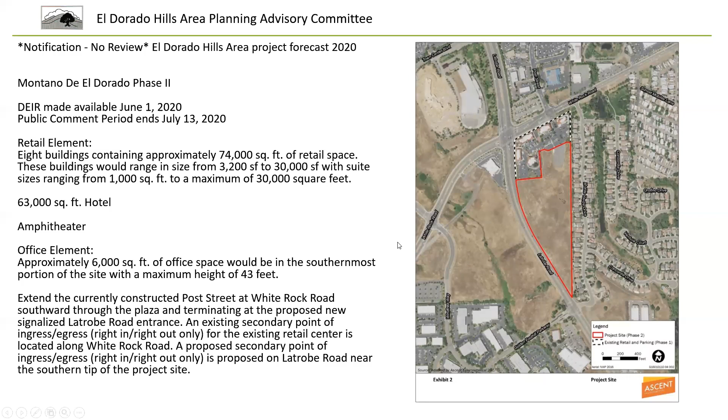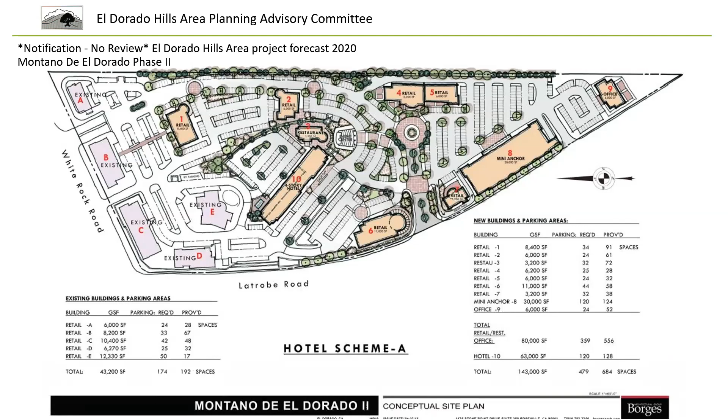I'm going to move this ahead. That's a basic layout of what the proposal was from the original documents that were proposed. And I see that Tom Purciel from the planning department is raising his hand. I'm going to go ahead—I got to get back, let me unshare this. Where are you, Tom?

There you are, Tom. Go ahead, you have something you need to provide for us. We'd love to hear it.

This is Tom from the Planning Division. I thought I'd give a quick overview. I know many of you are familiar with the project—it's been circulating since 2015 and before in various iterations. I wanted to give an overview of the EIR. I think Mr. Davey explained very well a thumbnail of the project. So if you'd like, I can go through the notice of availability of the EIR, what we're looking at, some of the timelines, preliminary information on our upcoming Planning Commission review and comment workshop, and any questions you might have on the project itself. So would that work, a quick overview and then answer questions? Sure, that'd be great, Tom. So if I can share my screen here—is my screen sharing on? I'm not sure how I would do that. I'm looking real quick.

Why is it not popping up? If you want to briefly talk about it, I'm going to try to get that for you. All right, well, as soon as you do... I have it on my screen. All right, here we go.

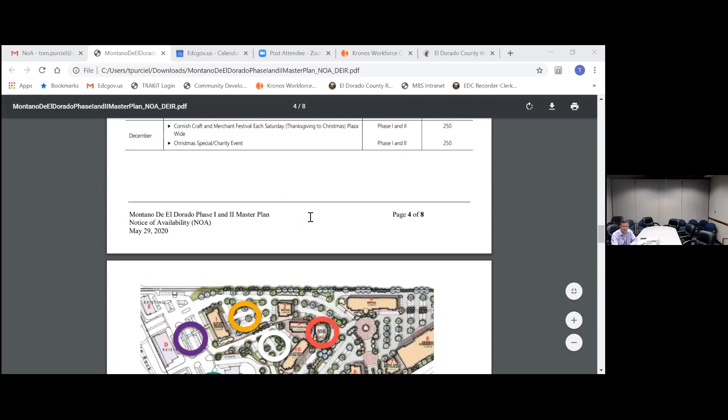This color photo shows the locations Mr. Davey was showing where the potential events could occur. I have a list here of the entitlement requests, what they're actually asking for to allow for this coordinated development between what's there now and what's being proposed.

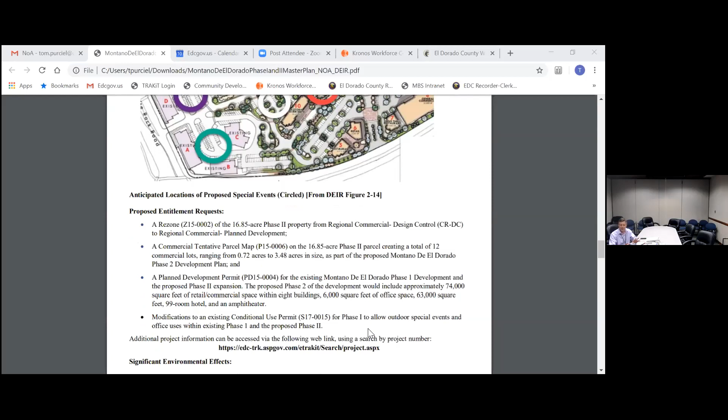These entitlements will help them move across property lines, share special events between areas of the plaza, and allow, among other things, a use permit for office uses, because this may allow regional commercial shopping but doesn't allow office for some reason.

So that's also being added to give a full spectrum of available uses. This is a summary of the environmental effects discussed in the draft document that you can link to. You've seen the preliminary site plan and the preliminary aerial photo of the location. I'd be happy to answer any questions, and the applicant is also available if you need more details.

Does anyone have any questions for Tom? John Rasslier, I do have a question.

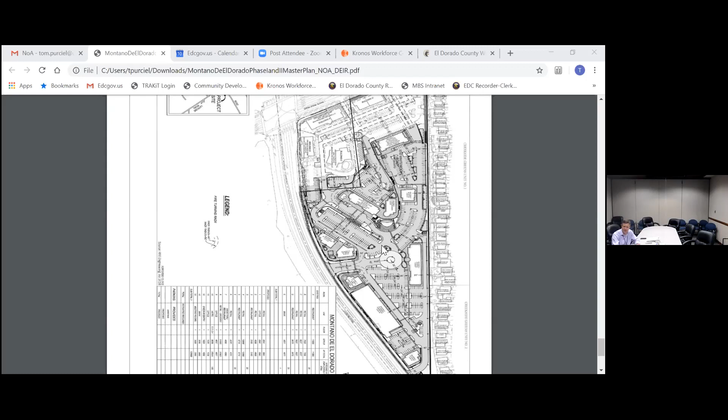How does this new proposal, how is it different from what's been presented previously? In terms of, not sure what you mean by presented previously. Well, we've seen this plan before at least two times, and I'm wondering what has changed that it has to be shown now a third time.

I know one of the reasons this was circulated before, and it didn't change much from the time APAC saw it before. That was its original submittal, out as part of the scoping for the EIR. The initial announcement that an EIR is going to be started, the first step in the California Environmental Quality Act, is to do some outreach, some scoping, for projects of this nature.

So the initial map you saw was very similar, but that was to scope what environmental effects to study, to get input from the community as part of the various workshops it covered. That document went out in 2016, and we had another in 2017, if I'm not mistaken. This is not the first time you've seen this, but it is the first project document attached to the formal environmental impact report.

Thank you. I believe the scoping meeting was in 2017 and it was recirculated in 2018. Correct, yeah, so it looks very similar. And as you suggest, this is the first official release of the project documents with the draft environmental impact report.

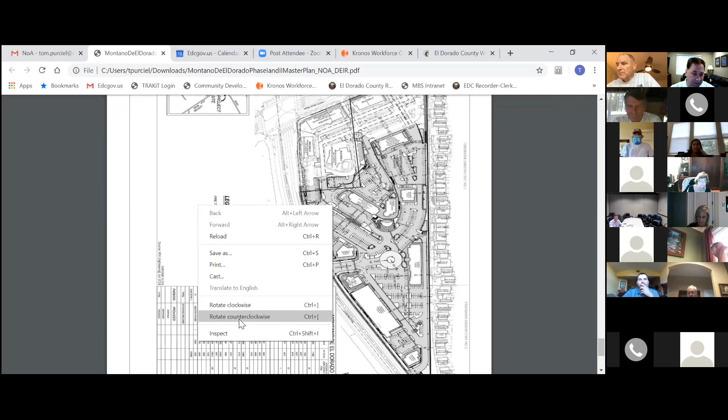Yeah, I told Tom, I asked Mel Pavlinas how long he's been in the business. He said he's been with planning for the last 15 years. And I said, hey, you've been working on my project for half of your career. Sure, but planning's done a fantastic job. I can't tell you how blessed I feel having Tom on board, Tom Purciel, Mel Pavlinas, all the people up there in the planning department has been tremendous, and I can't thank them enough. So I'm here at your disposal.

I think we've got a very, very nice layout. I think we've got a beautiful presentation for everyone. We've paid attention to detail and to the residential areas behind us. And I'm just hoping that we're going to end up getting some support on this thing.

That's good, very good, we're so glad that you called tonight. We actually have a couple of residents that have their hands up, they would like to ask a couple of questions. So Dan, would you want to go ahead and start? Sure, sorry about that, I was muted.

So questions I have are really around the amphitheater. I have concerns, I could throw a rock and hit it, so it's very close. It's not far from the property line of Creekside Greens. One of the concerns I have is, it sounds like a nice thing, but as it is now, when Relish is having live bands, when 36 Handles is having live bands that are supposed to wrap up by 9 o'clock, I'm still hearing them at 11 o'clock at night. I can hear them, I can make out words in my backyard.

So what kind of controls are we going to have in place to really have some sort of a limit on the times that these are going to be, the people in those houses along the fence line are going to be blasted by that amphitheater?

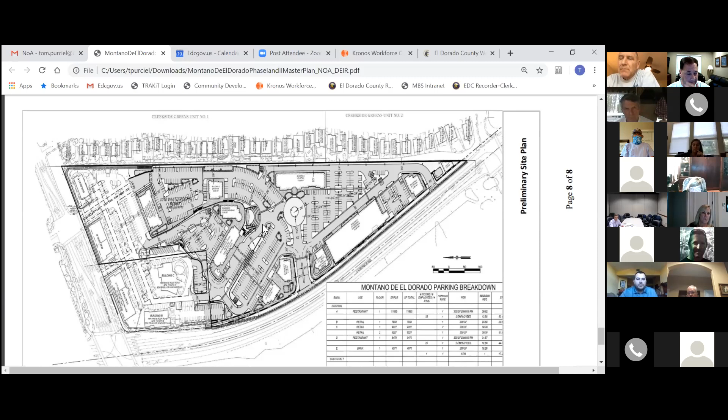But if you take a look at it, we're building that amphitheater down into the hillside, and the stage is actually down where, when people are sitting watching the presentations, they're looking down with walls on both sides of them that go down between, I believe, 15 and 20 feet. So the stage is basically in a hole. And within the EIR, we've identified landscaping and sound deadening walls and times that we're going to be wrapping it up, and that's going to end up being mandated through our development agreement.

Not to mention, we also have to have certain noise levels that are within toleration and low, and that's also identified in the EIR.

Mainly the reason why I put this in, a lot of people said, look, what are you doing, that doesn't make any money, it's just an amp. I'm doing this for the community. I had Runway Boutique saying, can we do bridal shows there, can we do a runway there? Can EDMT, the El Dorado Music Theater, can we pull them in there and have some things for the community?

So we've got Town Center next door. They've got a thing over there where they've...

Put me on speaker. I hope not. Oops, did you just get muted? Mr. Perkins, are you muted? There you go, okay, it said muted and I didn't know what it was. Yeah, and I didn't touch anything, I've been just sitting in my chair. I know, I just saw it flash up. So, but we heard you right up to after you discussed...

Yeah, so I'll wrap up what I was going to say. I was just going to say that Town Center's got a big deal going on over there where they're blasting big time music with thousands of people. This is nothing like that. This is nothing more than the possibility of bringing kids in to do some plays, maybe doing a Monday night movies at Montano with some black and whites or something, wrapping it up at 9 o'clock, doing some daytime stuff maybe.

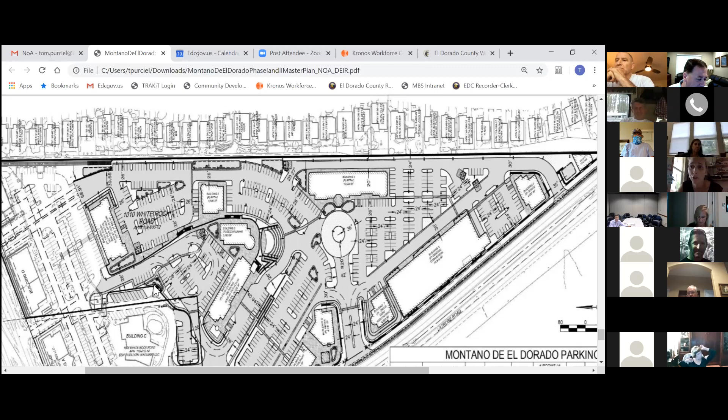Tom or Mr. Perkins, do you want to address the post extension through the project? Tom, do you want to tackle that, or do you want me to?

Well, actually, I don't have a representative from transportation here, which is the folks that would be recommending the improvements or the site-specific transportation impacts. So if you wanted to go ahead and explain the top level of what we're looking at, I can pull up the plan here.

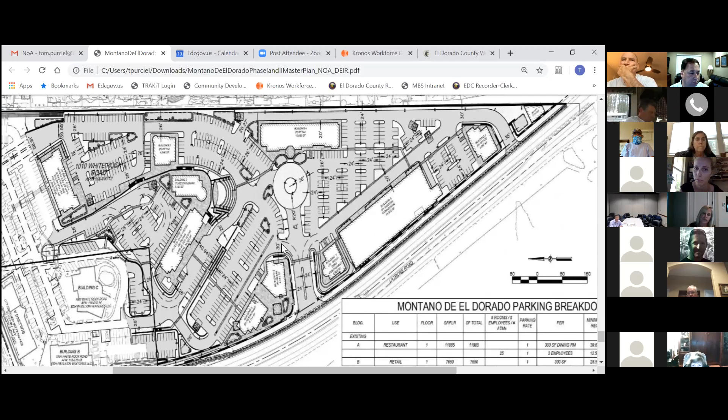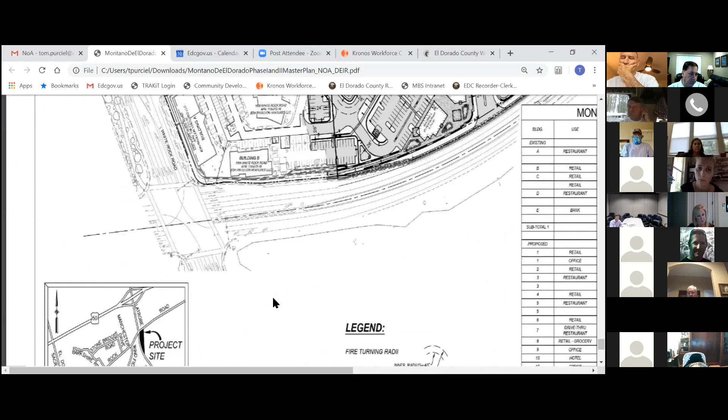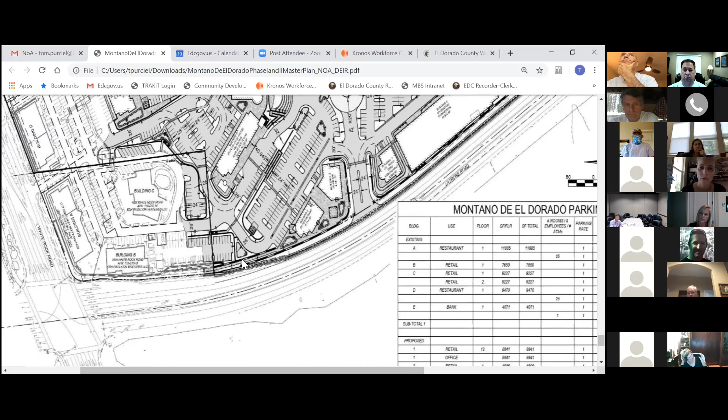We've been working on this for years, because any shopping center with this type of investment in amenities can't survive with just a right-in, right-out. So we were looking at the traffic signal dead on between Monteverde, or Golden Foothill Parkway, to the south and Latrobe and White Rock to the north. What we found was that if we added a main entrance with a full movement signal in the middle, dead on along Latrobe Road—and we're even talking with possibly Jackson Properties for something else—if we could get dispersion of vehicles so they could visit Montano or daylight through Post Street onto White Rock Road and travel eastbound to Silva Valley Parkway, or go across to Town Center, which we're lined up with, they'd be able to do that without impacting that big intersection of Latrobe and White Rock. At the same time, it would provide adequate access for the gross leasable square footage this center is hoping to present.

The entrance to the south, closest to Monteverde, is nothing more than a right-in, right-out. It's already existing; all we're doing is adding onto it, so people traveling northbound along Latrobe who pass Monteverde have the opportunity to take a right and go into the south end of the property. That's also where we're going to put a 10-foot sidewalk and extend it to Monteverde, which will help with the bike lanes.

No, I appreciate that. I remember when it was presented, I had asked if those sidewalks could be extended all the way to our neighborhood so our community could really walk there and utilize it. The reason I bring it up is my main concern is when White Rock is extended, we're getting blocked from exiting left currently out of our neighborhood. So Monteverde is going to become a huge intersection for us leaving our neighborhood and being able to go in whatever direction we want.

I'm concerned about that right entrance just because of the speed limit on Latrobe right now. I feel like we're coming onto Latrobe trying to get up to speed, and then someone's trying to make a right-hand turn right in there. But that's derailing this conversation.

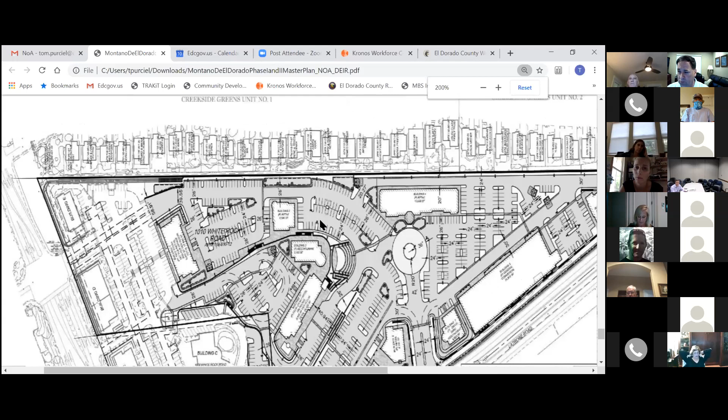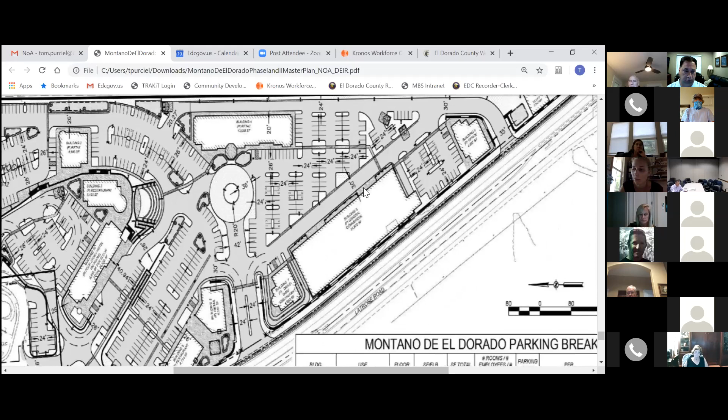In looking at the residential area and this regional commercial center, I did everything I could to pull these buildings as close to Latrobe Road as possible. But we also needed to make a site plan work. So in looking at that, we pulled the hotel and paid particular attention that we angled it, so that the majority of the visual aspect from that hotel is looking off into areas to the north and south, and not towards the residential area. We did the best we could on that one.

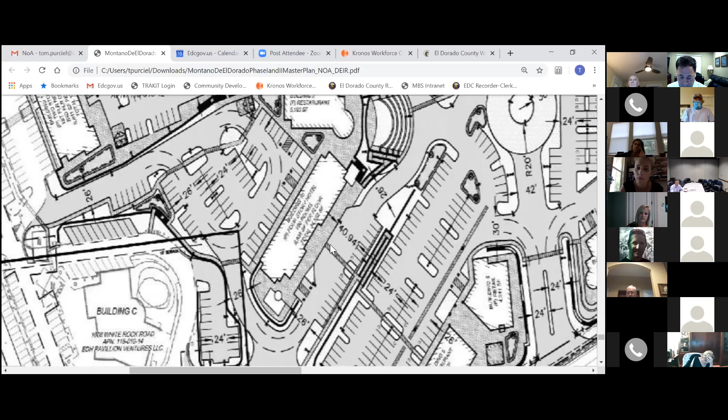What we're looking for is a Marriott SpringHill Suites. If you're ever up in Roseville or in Natomas, there's a few Spring Hill Suites around - it's a typical hotel. Usually they go 124 rooms, but we actually shortened it and ended up going with 100 rooms. So it's pretty much down to the room the exact same size as the Holiday Inn.

I think a while back, I'm going to have to look into our archives, I thought we did a visual impact analysis. Do you remember that, Tom? I'm looking at it now. I don't... that would be a good question.

If folks don't mind submitting that for a comment, I'd really appreciate it, because unfortunately with the technology and schedule limits, the EIR consultant - I don't believe he's on the line - but I know they did some studies on that, because height and visual is one of the criteria for impacts they have to look at. I don't have my fingertips on exactly what they looked at, but if I can find it while we're waiting, I'll let you know. I would definitely like to make sure that comment is filed so we can make sure it's addressed.

That being said, I was the developer of the US Bank as well - so don't get out your pistols and shoot at me, all right? But we learned a lot on that one, and we did everything within our power with everything that was going on.

We did everything we could to make the backyards of those other properties look good, even though you had a big retaining wall there. What was there before was a big fence line and a detention basin - an overground detention basin for stormwater. That's what was there, and then there was a hill that went up, and the shopping center was there. What we did was dig a big hole and put that oversized detention basin underneath the parking lot at US Bank.

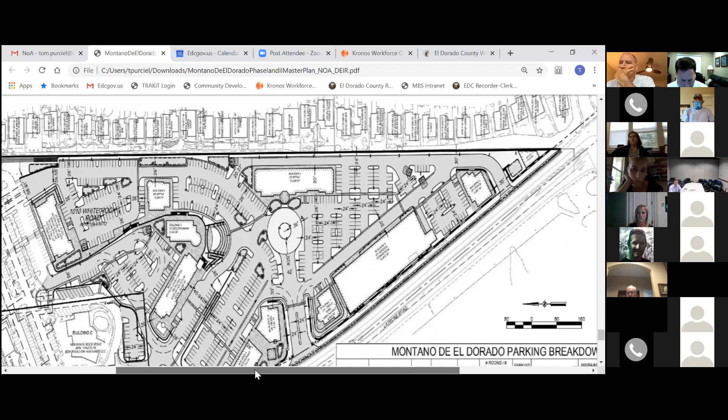Hi, my name is Carrie, and I am a resident of Creekside Greens, which is the homes right behind your proposed building, and I've lived here since 2005. When I first saw this, it's the first time I've seen this, and I did get something in the mail - I haven't seen this proposal over the years. Thank you, Chrissy and Dan. I'm warming up to the idea of all this. I guess my primary question is, how are you going to help control traffic in our neighborhood going into Monte Verde and into our community when construction is going on and thereafter? We're a small development, and the last thing we need is people speeding through our development - we already have traffic problems. So how are you going to help control the construction phase of this?

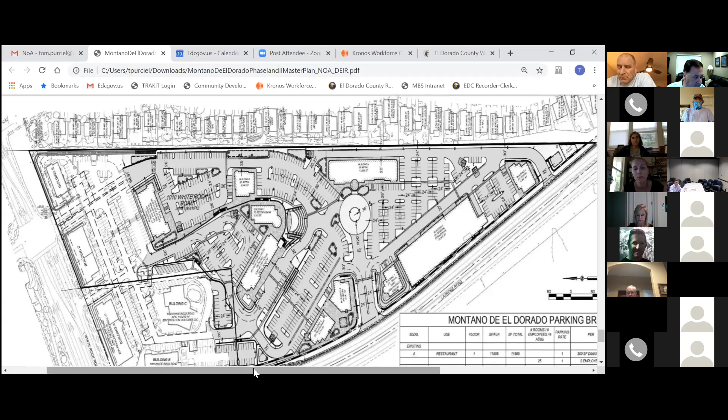I hope Tom is listening to this, because you bring up a valid point. When you talk about this, I think about offsite developments. If you're biting into Latrobe Road and expanding it out, you've got guys out there with flags, and certain things going on that impede traffic moving north to south on Latrobe, or even on White Rock Road. I can see that, but we've already got our entrance into phase 1 that is not going to be impeded whatsoever - nothing's going to change. Nobody's going into the new area, and most of our access for construction is going to be from White Rock and Post Street.

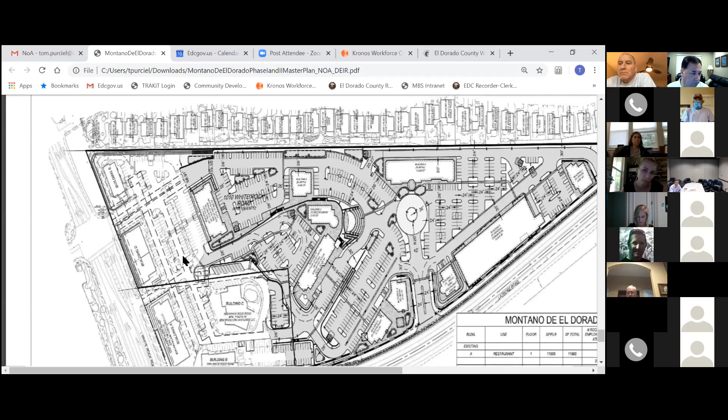I wish I had a little... can you guys see that? Yeah, can you all see that? Okay, good. I like that. Can you see my screen here? Yeah, I can see it.

I think most of our construction material is going to be coming up through the main entrance, and it's going to come along here and move along the back end and come in where the graveled area is now, where the construction trailer is. But as far as Latrobe and White Rock being impeded by any of the construction, this is all on site, and I don't see anything.

Impeding traffic along Latrobe - what's your comment, Tom? I would echo the same thing. I'd like to get more information from transportation, because those are the folks that do the field work implementing construction planning, signage, and traffic safety. The operations has a whole DOT unit of our county that just does that to make sure impacts are reduced. The environmental impact report will address some of it, but what's already covered by law and policy under regular operations will be handled by DOT. So I would rather have DOT speak to that.

I don't believe they were on this call tonight. But if those of you who can join the Planning Commission Zoom workshop item on the 25th, I would definitely ask that question of DOT again, because they can give you the details. I don't look at that part of it usually.

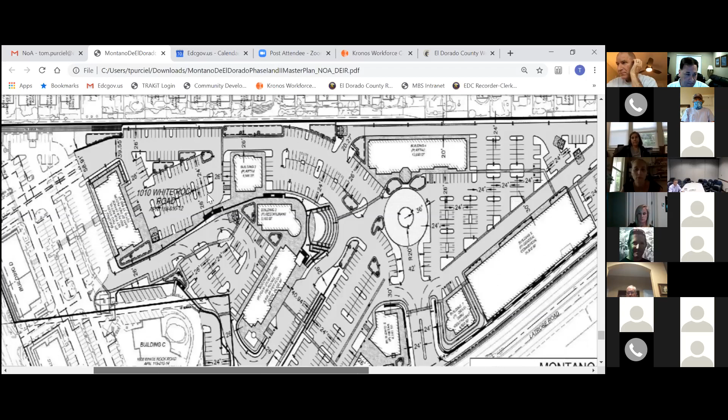And by the way, when you guys take a look at the events, we're not going to have all those events. I just pulled out every event that I could think is feasible for this project, because in El Dorado County, for each event you have as a one-day use, it costs $1,000 for whatever it is. I think the community would like to see some things happening in this shopping center - you take a look at Patriots Day, the runway stuff, El Dorado Music Theater. I've had kids go through the music theater, I think they would love to have an opportunity to see this. I don't think it's going to be that big - it's not Town Center, it's a beautiful retail plaza, but it's more boutique. It's not a town center.

Okay, thank you. Let's see who was next - Lauren was next.

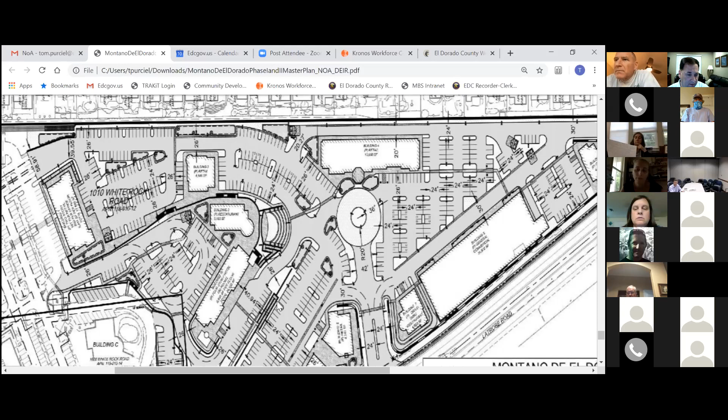So I read through some of the 300 plus pages. One of them mentions that a subwoofer was never going to be allowed at the amphitheater. So it got noted, and the reason I got it noted is, what's the follow through, what's the follow up, what's the enforcement? Those questions don't have to be answered now, we're trying to get this done quickly, so I just want it noted.

When you're taking the rating for the noise, I would like to know, because it doesn't state where the noise ratings are done. Our house is specifically right in the middle of our neighborhood, and there isn't a single place that if someone has a party in their backyard or does something up the hill that we don't hear. It's literally, like she was saying verbatim, I can repeat people's conversations. It's like being in certain places where they built it, where you can talk on one side and all the way across the yard field, you can hear the words. And a lot of people in the neighborhood open their windows at night in the summer to cool their homes. So that would be another thing - where are the ratings taken? Is it taken just around the site, or is it actually taken in our neighborhood?

And then when the concerts go too long, after let's say 10 more years of development being done, and nobody remembers that it's not supposed to go past a certain time, who would we hold accountable? Do we call the sheriff's department on that? Or is there some way to report those things and have a process for complaint?

Yeah, that condition is going to be in perpetuity. It doesn't matter who owns the shopping center. Nobody's planning on selling it anyway, but you never know, you never say never. But it is in perpetuity, it is going to be in the development agreement.

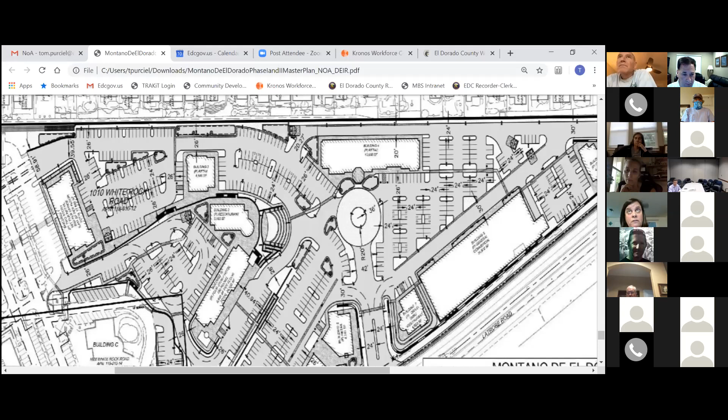We have 2 entrances. I think one of our concerns that wasn't understood is that both of our entrances are double-backed, so it's one entrance and an entrance, and an exit and an exit. One of our concerns also is, due to the recent situations with fires, we only have 2 ways out for 179 homes in this neighborhood, plus a possible another 6 duplexes that could eventually be built here. If you times that times children, families, and cars, that's a lot of people coming out of 2 small exits, and the impact there. So I would really encourage that traffic pattern to really be looked at and give some real actuals, with us having to leave in rapid succession, what that would look like with those lights.

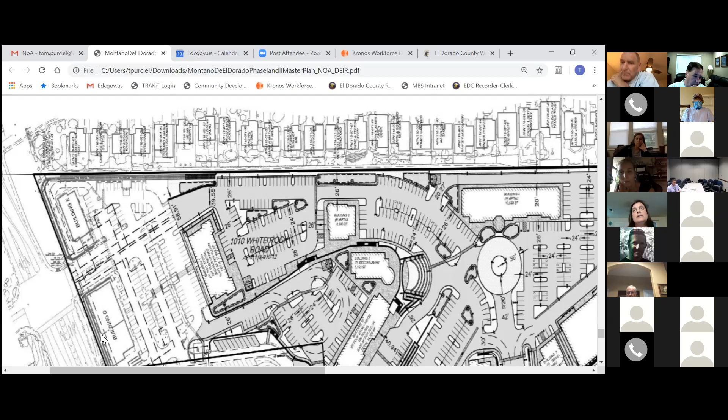And without a light. And then also, developer versus the people that live here - who is the responsible party once the developer is done with developing? Like I said, our neighborhood got developed, there were rules written in and stuff, and now we don't know who to go to get those enforced anymore. So I just like somewhere where that's going to either be documented or said. It doesn't mean that we don't want development, it does mean that we want to work as a partner and make sure these things are documented.

I think that you just have legitimate concerns, and that this is your home, and you know, to many it's the greatest investment of your life. I get that. You have - I raised my hand.

Okay, go ahead. I just wanted to ask, as the project manager with the county, were you going to be submitting those comments in writing so I can make sure all those questions you had are addressed? There were a lot of them, and I'd like to make sure we don't miss anything. I think we're going to work as a team in our neighborhood to make sure those are addressed, but I wanted it said so everyone was hearing that those are some of the concerning issues.

And when you do have a meeting, whether it's through Zoom or otherwise, this is kind of how I work, can you keep me as a developer informed, and I could be at your disposal?

That's fair. I believe we were talking about a possible follow-up dedicated to this project, and we had looked at that 45-day timeline, talking about sometime next week possibly. But if 60 days is more appropriate, then maybe it doesn't have to be next week. We'll take that offline, and I believe we've had those conversations. But we'd like to get more residents involved, and we want to be fair so you have time to answer questions, and fair to residents to ask questions too. We're a little constrained tonight.

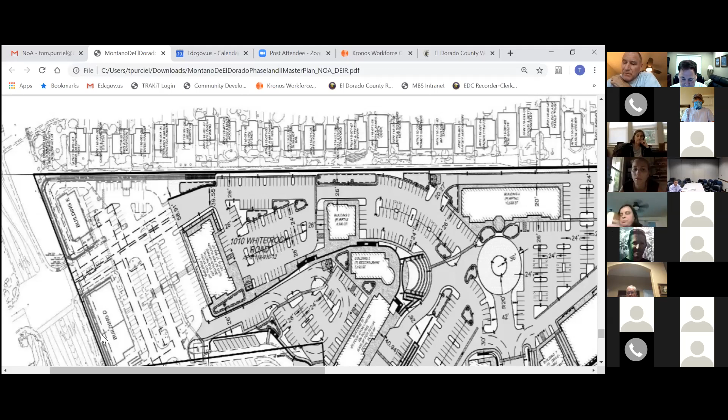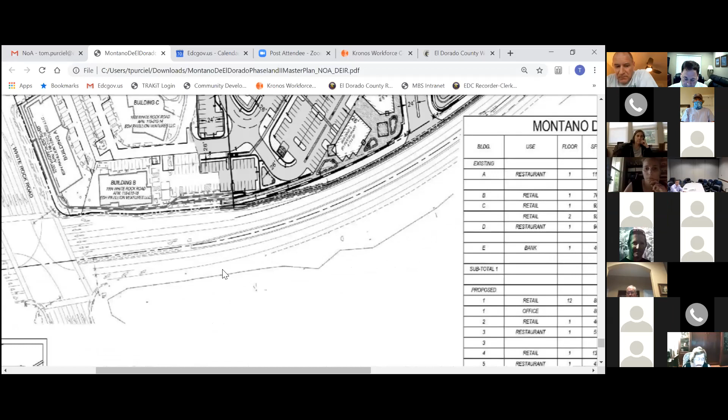You want to tackle that, Tom? I know transportation has already looked into that in very great detail, so I would defer most of that conversation to DOT, not that I can't take a stab at it, but those are the folks that have actually run the traffic counts. They've done some physical counts.

They've run computer simulations that are some of the best in the state to see, because I personally run our traffic demand model. Most people don't know that, but digitally they can get really close on seeing where the intersection choke points are going to be, for nothing else, to see where they need to be putting into their development plans. But those are all the studies DOT does, and that's what they spent large sections of this EIR doing. DOT has also crafted several custom conditions of approval to make sure that whether the state continues changing the CEQA environmental metrics for traffic, or not, as they have recently changed, the issues for traffic control will still be handled through a lot of these custom conditions on this site.

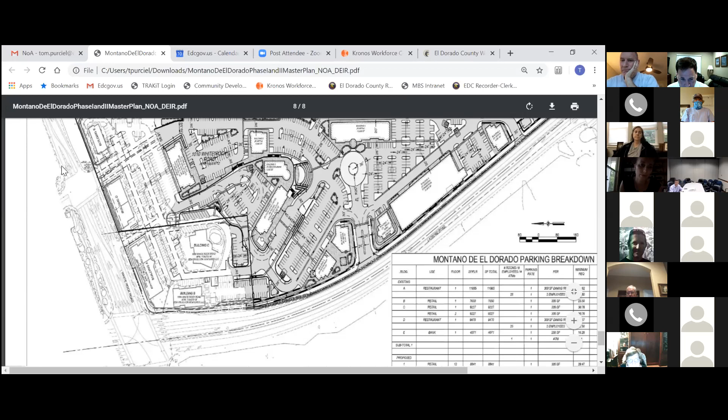My question is, I like the plan, I really do. But this intersection here at Post Street and White Rock, do you see it not impacting White Rock going east towards Town Center? Do you think that would not be impacting White Rock at all, or somewhat, or a whole lot? Especially with all the apartments that they're building in Town Center.

I think I'm going to try to get through this with the echoing going on without screwing this up. All I can say is that I'm watching the JPA connector and how that is going to impact that intersection. With those apartments going into Town Center, there's always going to be an impact, but it actually also makes that intersection more feasible than ever. It helps. If we have the access on Latrobe Road, along with the access there and the right-in, right-outs, we're going to have appropriate dispersion, as we've studied. I think DOT would agree with us, and I think that's why we're doing it. Not to mention, we're going to be doing traffic signal timing with fiber optics. God knows how much that's going to cost, but that's a condition. I appreciate that, thanks, I appreciate it.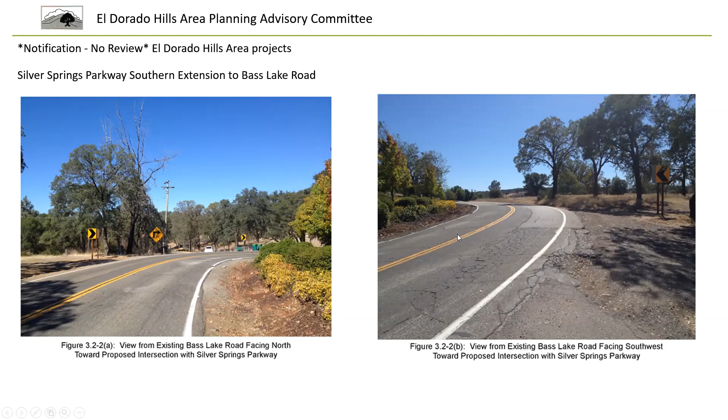The first item on our update list is the Silver Springs Parkway southern extension to Bass Lake Road. The northern extension has been completed for several years. These are a couple of looks at what the road looks like currently, just north of Madera Way, on the northeast side of Bass Lake, very near the Woodridge Village entrance. The image on the right is the southbound segment of Bass Lake Road, and the gravel there is basically the area where the road's going to be coming through. I talked originally with the Department of Transportation late last week.

They have a bunch of the area outside Woodridge Village staked off. They're looking at some utility relocations, primarily PG&E and EID. Once those are in place, they expect to get going on the project in 2020.

It's not going to be a quick project. It'll be rife with delays for travelers on Bass Lake Road, but it will extend Silver Springs Parkway south to that 25-mile-an-hour curve. That roadway already has bicycle lanes and sidewalks on the north part, and it will continue all the way to Bass Lake Road, where it will stop. This will be a massive safety improvement, but the primary goal is facilitating the development of the Silver Springs residential project.

This is a real quick look here. Madera Way is down at the bottom, it curves right here, and the roadway will come through. The changes of this project will extend about 800 feet into Madera Way. They're going to lose a lot of the landscape frontage along the outside of their wall, but they're gaining a right-hand turn lane into their neighborhood, which neighbors have been asking for many years. They already have a left-hand turn lane there.

Rich is pretty sure this will be going to the Board of Supervisors soon, so they can put out a request for bids for contractors. So, are there any questions about the Silver Springs Parkway Southern Extension?

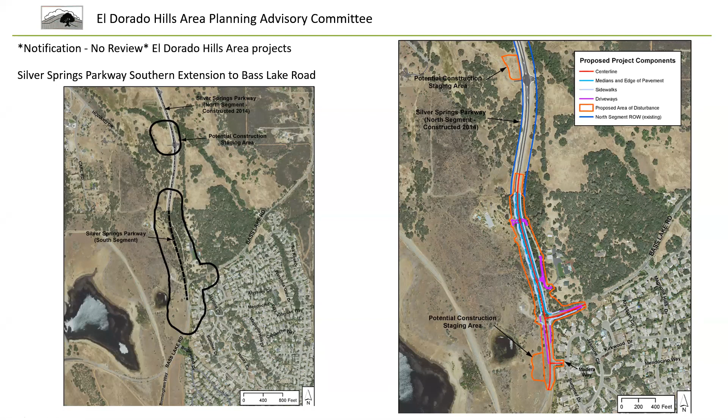Well, good, we're going to move along. The next thing is the Silver Springs residential development, a very old project. You may have seen it if you travel on Green Valley Road near Silver Springs Parkway at the north end of this project, next to Pleasant Grove Middle School.

They had begun grading and underground work there in the last year. They came back seeking a 2-year time extension on their subdivision tentative map. I was surprised because they did this 2 years ago and asked for another 2-year extension. They could have asked for 6, but they're back again, and this was granted. This basically just extends the term of their subdivision map so they can get this project built out. It's a long approved project.

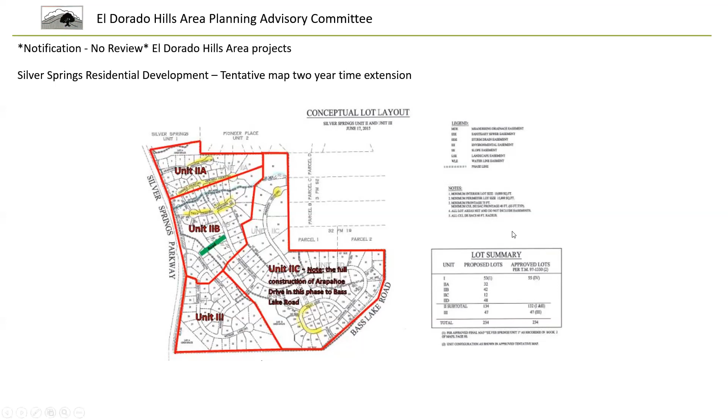There are about 234 houses in it. As I drop through this, you can see generally where it's at. That road extension will come through, this is an old map, all the way straight through to that curve. Where they're working right now is in the northern section. Foxmore Lane from inside of Sierra Crossing will connect to that road, and the middle school is right over here. So that's where they're at on this.

They were granted the time extension, so they have 2 more years on their tentative map. Expect to see more construction continuing there. I imagine the condition of the economy factors into their timelines, but it seems residential is still going regardless of how dire things may be right now with COVID.

So jumping ahead, I'm sorry—hey, unless John, can I say something on that? Sure. It's John Vania. Yeah, the people who live on Foxmore, their whole world is going to change. I hope they know that. Well, it's been planned for a long time, but yeah, it is significant. Yeah, because you're going to have a whole lot of school traffic going down through there, so they need to get ready and plan ahead for that, because that's going to happen.

Yeah, and it's unfortunate. That was one of the Green Valley Road studies a couple of years ago that determined, hey, what can we do to improve the traffic on Green Valley Road? One determination was that they need to improve the ingress and egress and traffic flow inside the Pleasant Grove campus and their parking lot. But the first thing they did when they put this traffic signal in at Silver Springs Parkway is eliminate the right-hand exit out of the eastern side of that project, because the grade changed so much you can't take a car out of it without it bottoming out. So they technically lost the driveway.

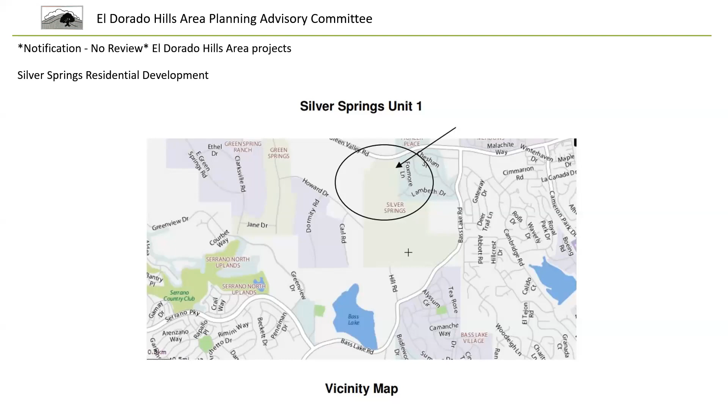So Bass Lake North was next on our update list. It's a 90-home project that's part of the Bass Lake Hills specific plan. It was approved in 2017, and it's right along Sienna Ridge Road, the old Bass Lake Road technically. They too had sought a time extension for their subdivision map. They had to delay getting annexed into EID, which was part of their plan, and LAFCO took a while getting it done. They were annexed in, and this also was approved. They have a 6-year time extension on their subdivision map.

It's a part of phase 2 of the Bass Lake Hills specific plan. There's a question about whether they'll be able to provide the total amount of parking spaces at the proposed parking, which was a condition of approval. That's a separate matter that'll be coming back to the Planning Commission at a future date.

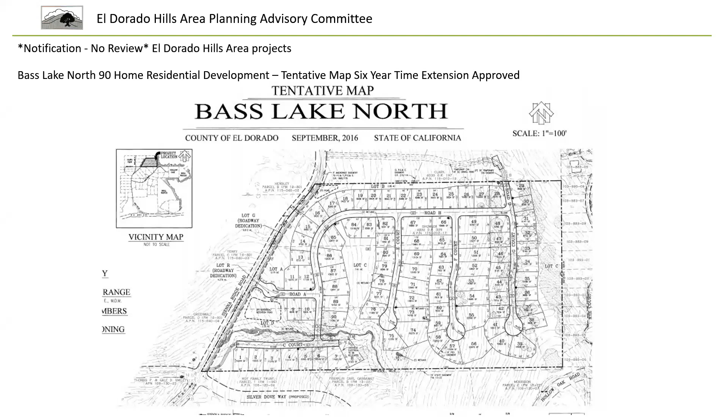So unless there's any questions about Bass Lake North, we could move on to the Bass Lake Road detour. These photos were a couple weeks old. This road segment right now does not exist anymore. The grade has been raised, it's level, consistent with this small section, this temporary section. This is the new Country Club Drive, and down at the bottom is a view looking north towards Bass Lake Road. This road segment doesn't exist anymore.

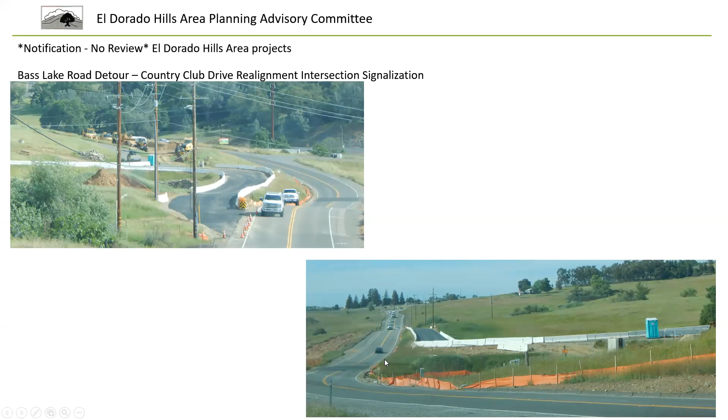So I talked to Richley about this, and the original projection for this detour was that it was going to last through mid-August, maybe later, depending on weather and other issues. Rich shared with me that he believes the detour is going to be done by July. So that was good news.

I drive this infrequently since we have no place to go now with COVID, but this is a realignment of Country Club Drive on this photo down here. It's going to take Country Club up Tierra de Dios, which will become Country Club Drive past Holy Trinity. It comes up over the hill, and comes out roughly where City Lights Drive is, a gravel road around this alignment. And this is where the detour is right now.

When this is done, there'll be a signalized intersection. It'll have left turn lanes, and very long queuing lanes for different turn movements, right and left. And it moves all this traffic from just adjacent to the interchange, which backs up on Country Club in the mornings pretty far back, almost to Holy Trinity, and also obviously on Sundays when Mass is in session. So it's a needed improvement.

It's part of the Bass Lake Hills specific plan. They believe they're getting ahead of it right now, that the timetable is a little bit accelerated. Rich believes the turn signals, everything will be done probably by the end of October, so that Old Country Club will become a bike lane or bike route, and you'll have signals and everything in place right here.

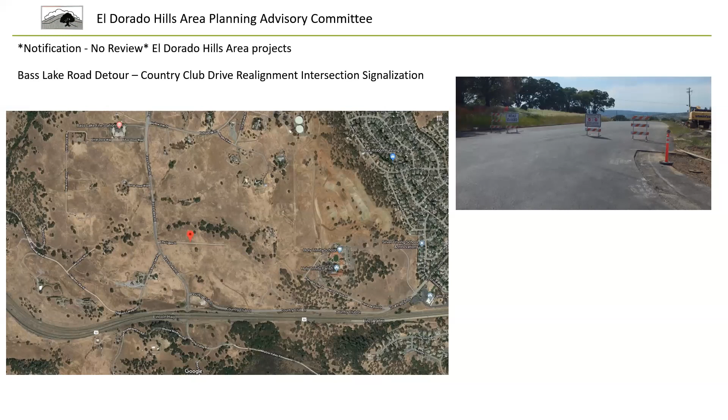When you're talking about when they were scheduling to have the detour done, there was some interference and I didn't hear what the date was. Okay, the original schedule was mid-August, August 15th, perhaps a little later. The new updated schedule, as long as things hold steady, is the end of July. Okay, thank you. Thanks for catching that.

I'm moving ahead to Saratoga Retail Phase 2, which has a very long history. We all talked about it at APAC for many years.

The original proposal had been for a drive-through Chick-fil-A and a drive-through Habit Burger. That got denied at the Planning Commission a few years ago. They came back with an alternate version with just the Chick-fil-A and another building that did get approved. The residents worked with the developer because they were not satisfied with this project as it was approved. Consequently, the developer agreed to make some changes. Chick-fil-A is out and has been for over a year.

They started construction on these buildings. Right now, from what we understand, this building, building 3 up here in the corner, adjacent to the on-ramp in El Dorado Hills Boulevard at the interchange, will be a drive-through Starbucks. There's some smaller suite spaces right here, and I believe the large building is supposed to be a Kelly Moore paint shop. If I've missed any details on that - but basically, if you've driven by the boulevard and the interchange, buildings are up now.

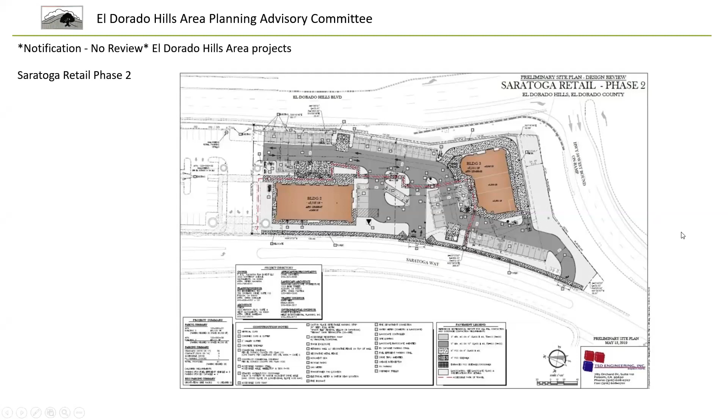This photo is from probably 3 weeks ago. There are buildings framed and sheathed, and they're going full tilt over here. The original estimate for the project, I believe in the Business Journal, suggested it might be done by July, but I couldn't get confirmation and nobody would return my phone call. So if you're driving by, people have been asking what's going up there on the corner. Well, that's what it is. Does anybody have any questions or feedback about this?

You guys are too easy.

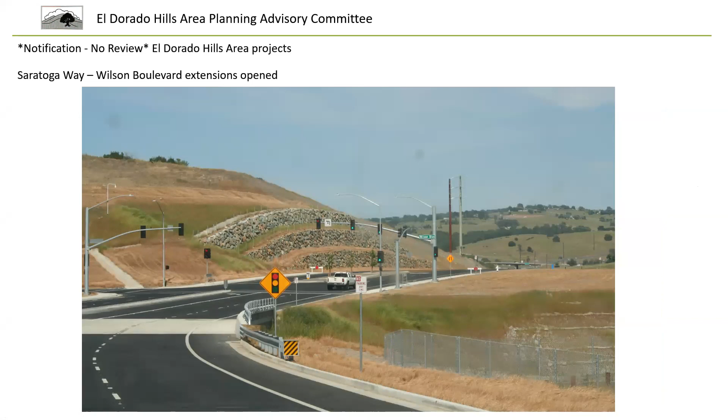So the next item on our agenda is the Saratoga Way and Wilson Boulevard connections. The extensions have been completed in April. This is what it looks like coming from west to east, coming into El Dorado Hills at the Wilson intersection. And that's at the intersection right here.

So I've noticed, as I've only gone by it a few times, that the traffic seems to be increasing, especially as more people are out and some of the stay-at-home restrictions are being lifted. I took a couple photos here. I know residents have some questions, and we heard from Rafael Martinez about the timing of the traffic studies that are going on now that this is completed. They're eyeing August and September because the expectation is that's when kids will be back in school. We hope everyone's back in school and healthy, but that way you get an accurate forecast of what those traffic flows look like.

But a lot of APAC members, a lot of people contacting APAC wanted to know why there's no traffic controls at Finders or at Arrowhead. The speeds are pretty high right now, and the study will probably reveal numbers. We don't know what they will say, but the perception is it doesn't look entirely as safe as we had hoped, and that's from several neighbors, several residents.

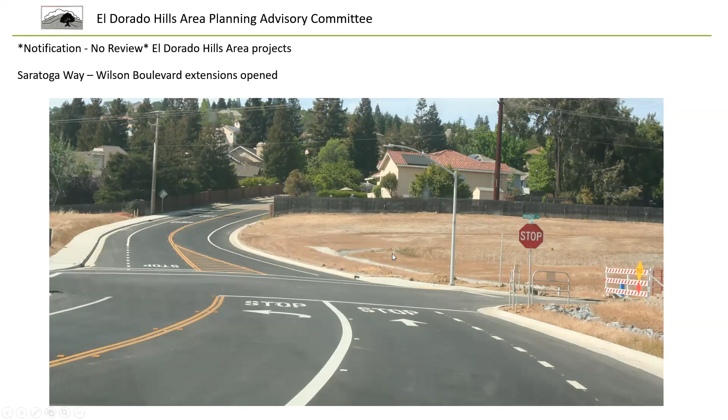There are stop signs on the new section on Wilson, and we don't know if there's a traffic study done to justify those. But here's what they look like at Adirondack. There's these two that are on this new road segment, adjacent to the new development. So we don't know how those were justified or how those were warranted.

I don't know if, Brooke, if you had anything you wanted to throw in on that. I know you had some conversations and correspondence with DOT Director Martinez. Yeah, so I can speak to that a little bit.

I'm still confused in researching the information he gave me, but apparently the study that used the built-out numbers for the community, completely built out, not just phase 1 or phase 2, led to the justification of those 2 stop signs. And I had asked the specific question of why that documentation or those numbers couldn't be used to justify the stop signs at Finders and Arrowhead, because obviously it would be the same cars. They can't magically get to those stop signs without going through one of those intersections.

And I don't have an answer to that yet. One of my concerns is at Finders, there literally isn't a crosswalk in any direction. So while we had questions about the stop sign, I was curious why there isn't a crosswalk.

And then the speeds - my house is literally right behind, my backyard backs up to Saratoga, right at Finders. So we have been monitoring the speeds, and they are getting really scary, because while the picture doesn't do it enough justice, there is a severe grade. So as you're coming on Saratoga going towards El Dorado Hills Boulevard and you pass through Finders, there's a considerable drop, and people slowing down have been unable at times to make the left-hand turn onto Finders. You can't see the traffic if they're queued up at Finders as you're coming down Saratoga.

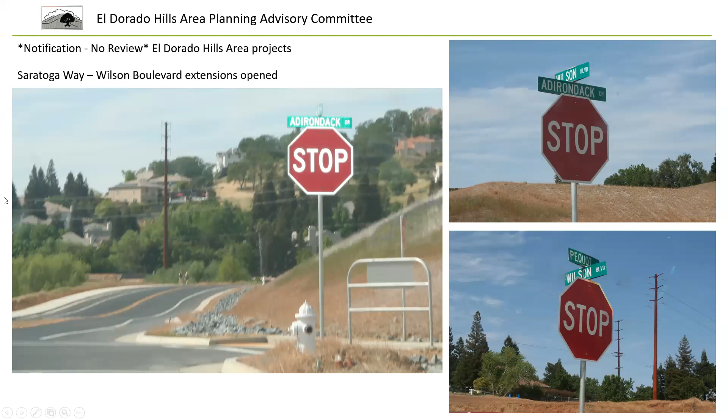So something I proposed, if it comes across our desk - I know that some doctors bought the parcel of land further down Saratoga, right next to the medical center. Their plan is to build another medical center right next to the new one on Saratoga. And there we could likely connect, at least get a sidewalk and a crosswalk going up to this new community as part of their conditions.

Yeah, I know that we experienced that in the Bass Lake area, specifically with Serrano J6 and J7. There's a segment that would, to make it walkable through all the communities adjacent to it, not be in front of or contiguous with the Serrano project. And the comeback was that, hey, it's off site - it's not a matter that had been considered or evaluated.

I know you've had communications with Director Martinez, and I'm hoping he continues to provide feedback. My only observation is that every intersection on Iron Point Road in the city of Folsom, except for one, has some sort of traffic control. So our question was: was a traffic analysis done at every single one of those intersections?

Was it consistent with what's done at Saratoga Estates, where they proposed that the total build out justified those traffic controls? I don't know if it's a city of Folsom thing, but the only intersection in Folsom on Iron Point that doesn't have that traffic control is where the road ended prior to the connection to Saratoga.

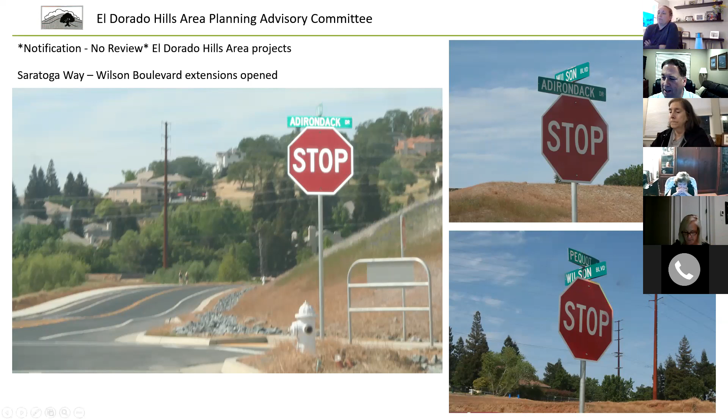Here we go. So, hey, Costco, how about that? A lot of people have been mentioning on social media again that the Costco project's done, it's not going to happen, that they don't want to do it in the county, they want to do it someplace else.

I reached out to the real estate team that we had met with in the stakeholder meetings and asked for an update. I know they've been updating the county, but just what's available for the public to know that's not inappropriate to share among the public.

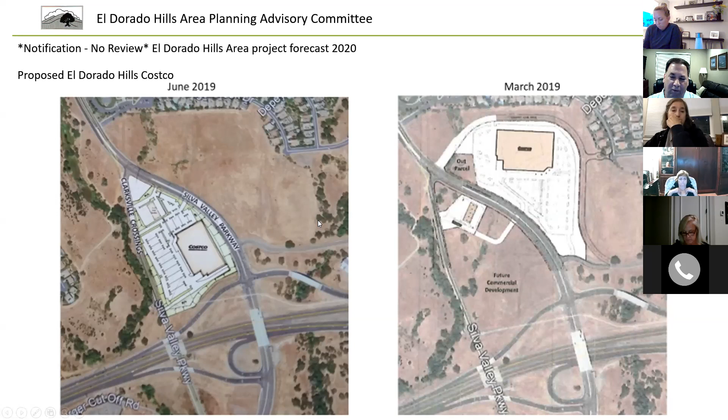This is basically a very limited conceptual drawing of what they're talking about. Part of this facility was that they were going to have underground parking below grade, which they had not done anyplace else in the United States. That is prohibitively expensive to do. So if they're entertaining doing it, you can be pretty well assured that they're very interested in this project.

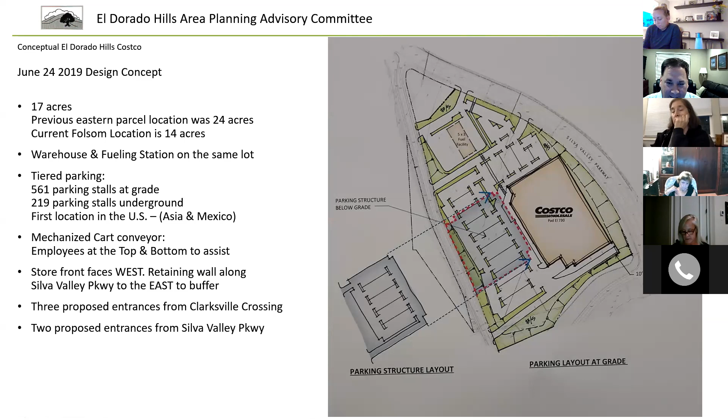So when I talked to him, he said — and I'll jump ahead, I think I have it here — they have entered into a purchase agreement with the EDH 52 property owners at Silva Valley for the western parcel that they discussed with the below grade parking.

Costco is solely interested in this site in El Dorado County. They're not looking at any other site. They've studied every other interchange on US 50 in El Dorado County. None of them would be applicable for what their store would generate and the impacts that would bring. Silva Valley's only Class A intersection that would accommodate them.

They're not interested in Placerville, El Dorado, Diamond Springs, or Cameron Park, primarily because the interchange doesn't exist in a capacity that would serve their project. Also, there are 42,000 people in El Dorado Hills and only 10 to 12,000 in Placerville, maybe 14 to 16,000 in Cameron Park.

They know where their members are, and their hope is that they will drive new members from the city of Folsom and the Folsom Ranch project to the south. White Rock Road will drive straight to their project, so they'll lessen the impact on their existing Folsom store and better serve their members in El Dorado County.

The only other thing he qualified for me was the projected timeline once they got going with approvals. Due to the COVID crisis and the current economy, there's some uncertainty. They're still dedicated to doing this project, but their timelines are different because they have to look at economic conditions. They're also uncertain where the county's at—they want to make sure everybody's on board, but they intend to pursue this. It just might take a little longer.

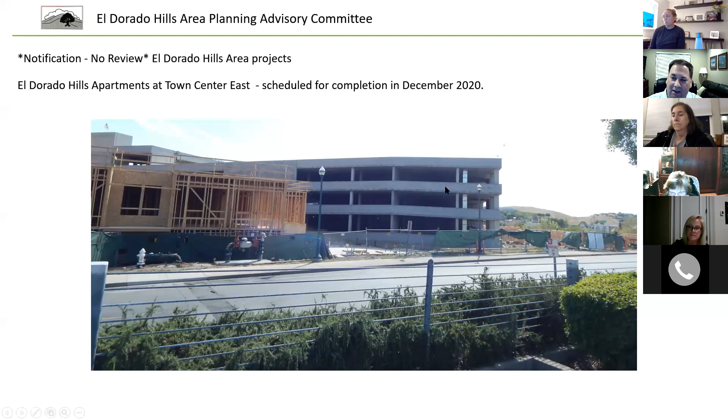The parking garage is primarily completed, as you can see here—this is a photo from the Regal Cinema parking lot. The buildings for the apartments themselves are being constructed, going up now. These photos are a couple of weeks old, but they're moving along pretty fast. There's a parking garage from Town Center Boulevard, and you can see buildings going up in the background—moving pretty quickly.

They had committed to a December project timeline, but without an update, we're not certain that's still what they're looking at. So if there's any questions about this...

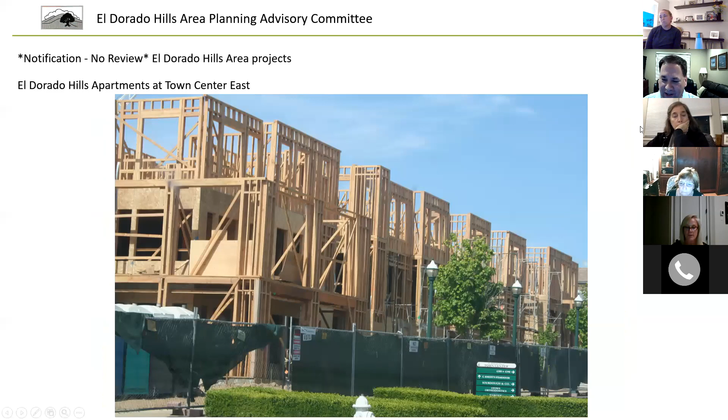Our next meeting is scheduled for July 8th at 7 p.m. I imagine it's going to be virtual unless something's changed—the CSD is not opening up the pavilion for use yet, so we'll do our best to accommodate everybody. We're still looking at a standalone virtual meeting for the Montano de El Dorado project. Mr. Perkins, when we contacted him, was very eager to engage in that, so we talked about perhaps next Wednesday, maybe not at 7, maybe at 6. But if his project, if he's willing to go 60 days, we might push it out a little further. I'd rather have the information in the hands of residents sooner so they can have informed opinions and questions and concerns to submit for public comments on the draft EIR.